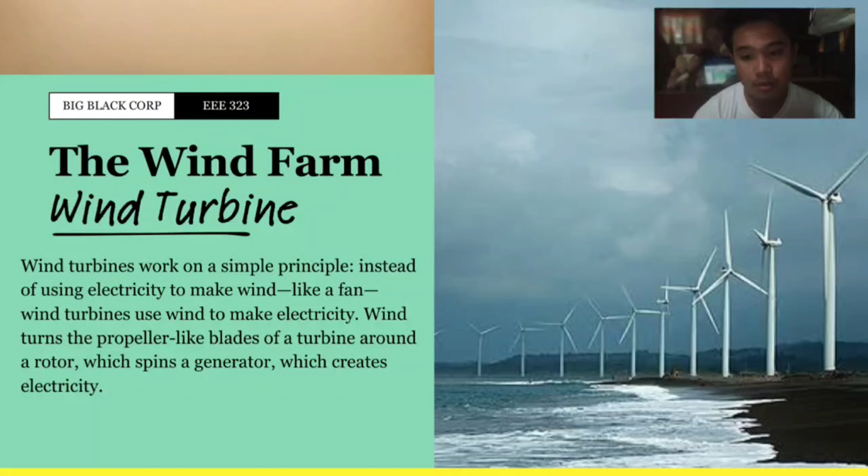So today, me and my company are going to discuss the topic of wind farm, specifically the wind turbine. So what is the basic principle of a wind turbine? Wind turbines work on a simple principle. Instead of using electricity to make wind, like a fan, a wind turbine uses wind to make electricity. Wind turns the propeller-like blades of a turbine around a rotor, which spins a generator, which creates electricity. So that's the basic operating principle. Before we move to the next slides, let's watch a short video we will present to you, so we can see how an actual wind turbine functions.

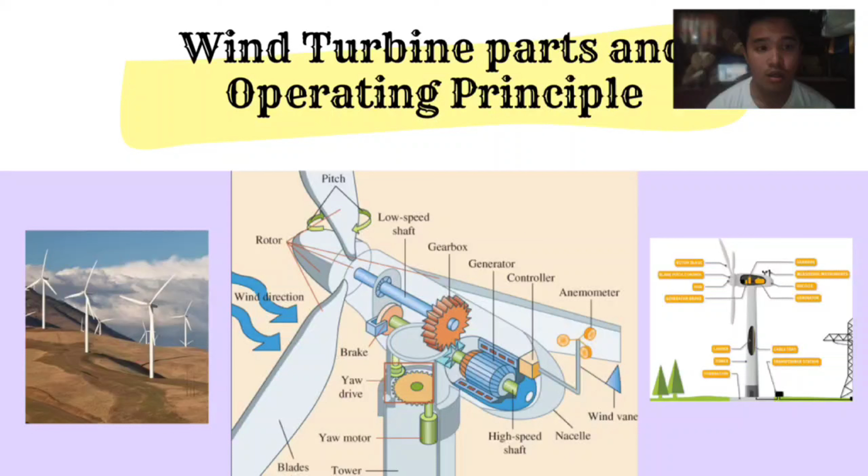And lastly is the nacelle. The nacelle is basically just the housing for our wind turbine parts. And to better understand the functionality and proper arrangement of our wind turbine parts, it will be discussed by my co-members.

So next, the blade is the part that rotates due to the force it catches from the wind. It is connected to the low-speed shaft via the hub. The low-speed shaft is connected into the hub and then connected to the gearbox. Then the gearbox is connected to the high-speed shaft, going to the generator. Once the blade rotates, it causes the rotation of the generator, thereby generating electricity. Most wind turbines consist of 3 blades for maximum efficiency.

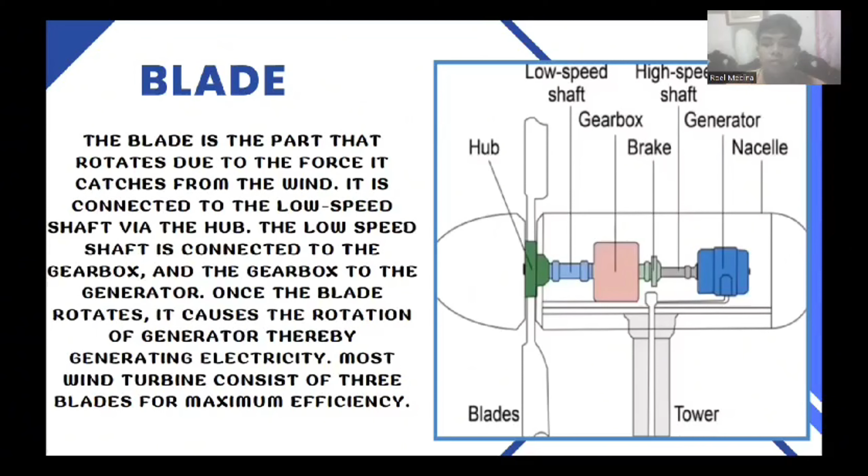Next, blade design. To produce an amount of power, wind turbine blades generally need to be large and tall. It is shaped to generate the maximum power from the wind at the minimum cost. In designing the turbine blade, the longer the better, because the longer it gets, the more capable of capturing kinetic energy coming from the wind. Improvements in design have produced new wind turbines which are more compact, quieter, and generate more power from less wind. Their length varies around 50 meters, with 107 meters currently the longest from Siemens Gamesa.

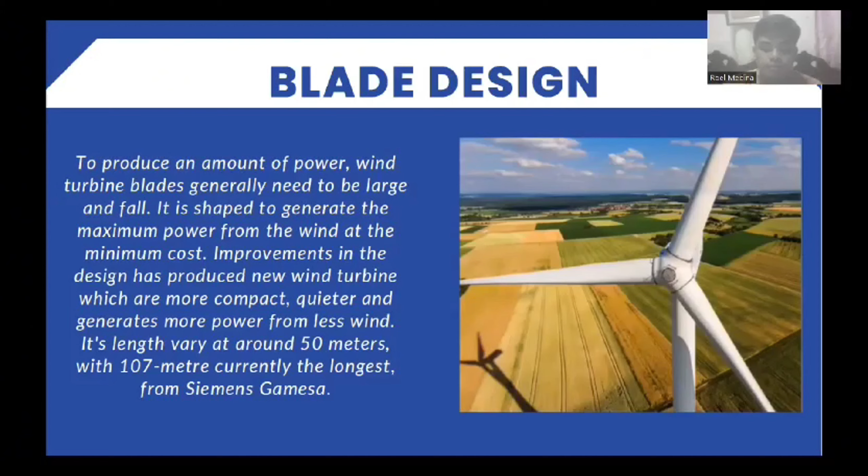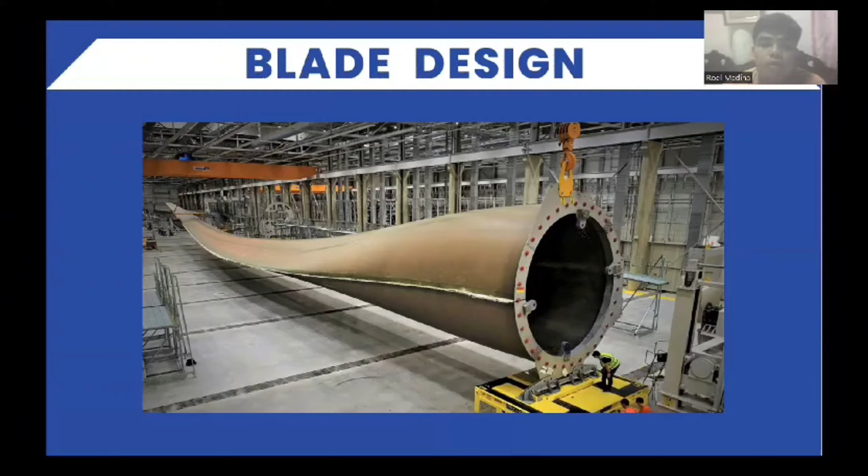Okay, next, this is an example blade made by Siemens Gamesa. As you can see, if we compare it to a person, this blade is really large. Next slide: the airfoil is the cross-sectional shape of the blades determines its aerodynamics.

This is the cross-sectional area. When cut, this is the resulting shape. The variant of the blade turbine differs, but mostly this is the shape, and it plays a vital role in its aerodynamics. This shape of the cross-sectional area of the blade causes it to rotate faster than the wind velocity.

They are key to the blade design. This airfoil design allows the blade tip of a wind turbine to move faster than the wind is moving, thus generating more power and higher efficiency.

Now we need to determine the more curved and the less curved side. This part is the more curved or rounded outward, and this side is the less curved side, which is rounded inward.

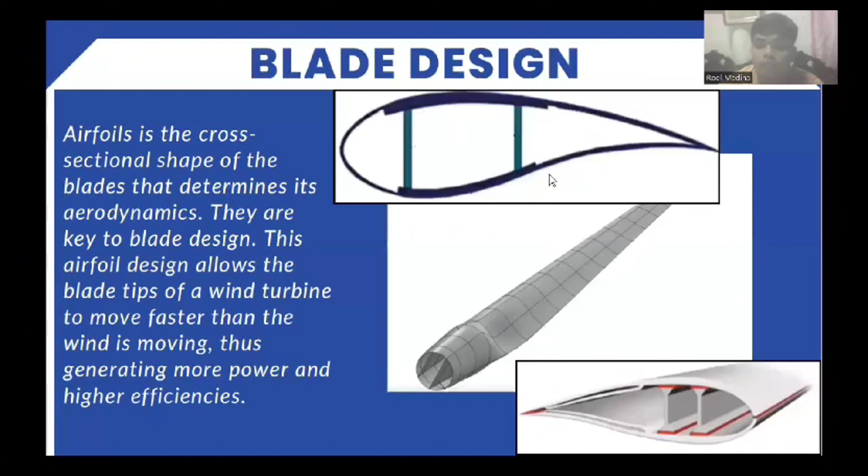In addition to its curved design, twisted and tapered blades further enhance its aerodynamics with the combined effect of twisting and tapering the blade along its length, improves the angle of attack, increases speed, efficiency, and lift, while reducing drag. Here, it's not just simply curved in design, it is also twisted and the edge of the blade is also tapered.

Blade aerodynamics: wind turbine blades work by generating two aerodynamic forces, lift and drag. This is due to the wind and the airfoils. The lift force is perpendicular to the airflow and is in line with the blade rotation. On the other hand, the drag force is in the line of apparent wind direction, which means it is in opposition to the wind direction or the blade motion. The drag increases in proportion to the frontal area of an object facing the wind.

And both of these are formed by the difference in air pressure across the two sides of the blade, which creates both lift and drag.

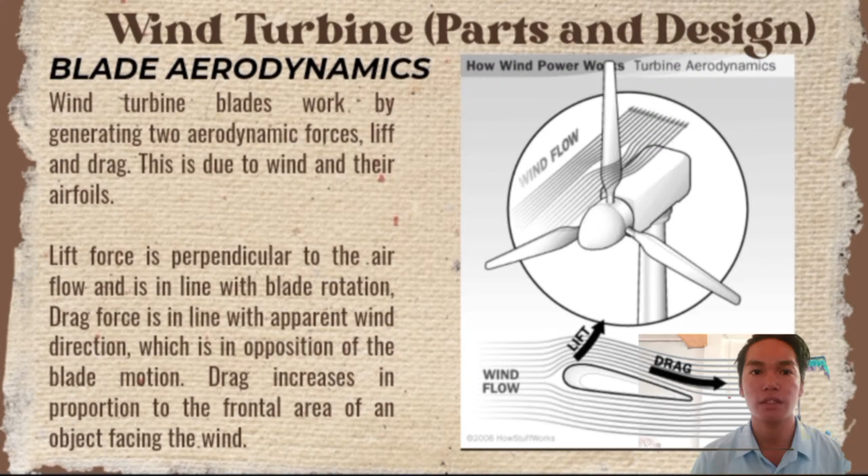Here we can see the lift and drag formula. I won't explain this too deeply, but you can see in the picture the angle of attack, relative wind, and center of pressure, and the equations. So for that equation, we have the lift equation and the drag equation, where lift, or capital L, is equal to the lift coefficient C sub L, times the density rho, times the half of velocity V squared, times the area A sub B over 2. It's the same for drag force, just with a different value.

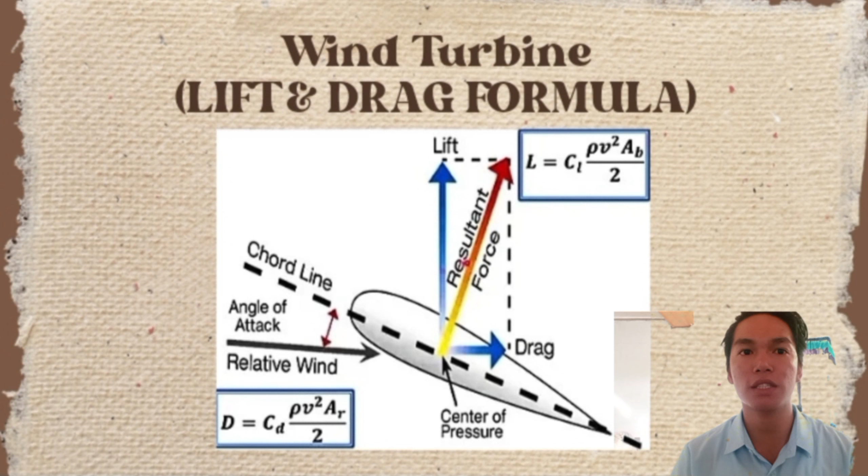Another thing the airfoil is able to do is allow the blade to attain the difference in pressure on both sides, which I mentioned earlier. The more curved, or convex side, will generate low air pressure, while the high pressure air pushes on the less curved side, or the slightly concave part. This is the actual reason for the blade rotation.

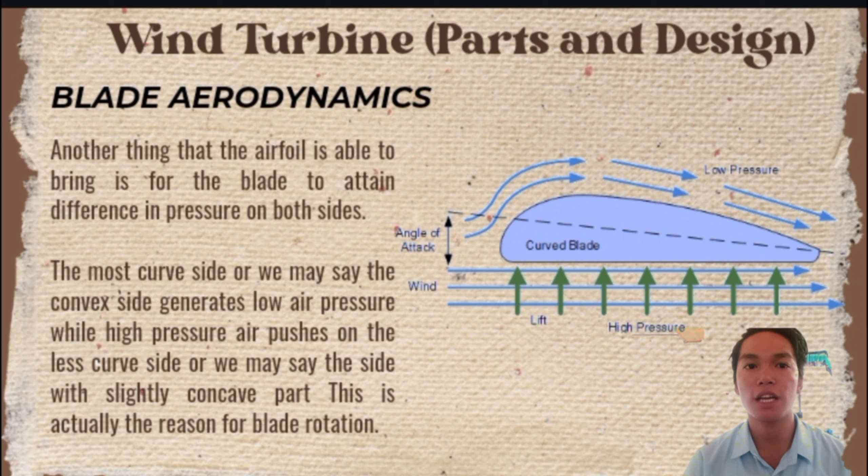And actually, if the force of lift is stronger than the drag, that will cause the rotor to spin.

Next slide, we have here the blade wind orientation. Here's now the question based on the figures stating the optimum angle of attack. The angle of attack is the angle at which the relative wind meets the airfoil, and it's an angle formed in the chord of the airfoil at the direction of the relative wind.

And here's a question: which part of the blade is the leading edge and the trailing edge? Front and back.

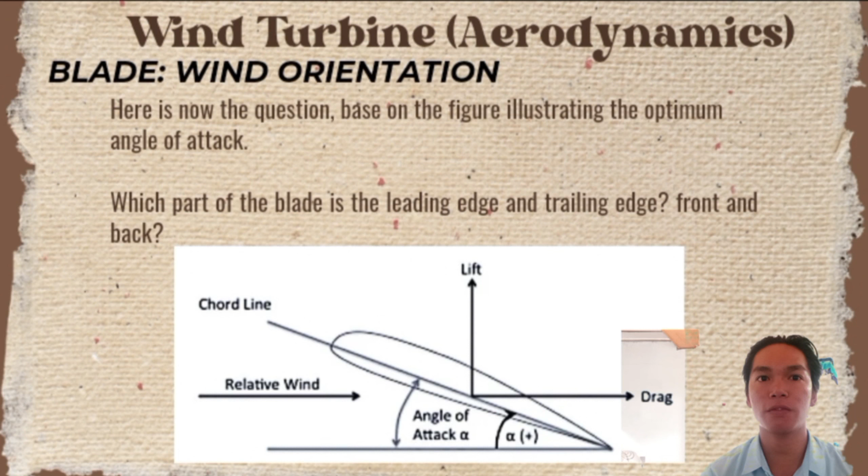The leading edge is the part of the blade that is first hit by the wind in normal operation. This leading edge is usually fatter than the trailing edge, and typically should be smooth with no imperfection. The trailing edge, on the other hand, is the blade at the end of the airfoil. It is usually a knife edge of the blade, although today the trailing edge can be what we call the flat back of the airfoil, in which the knife edge is cut off flat, which allows for a stronger structure and less weight.

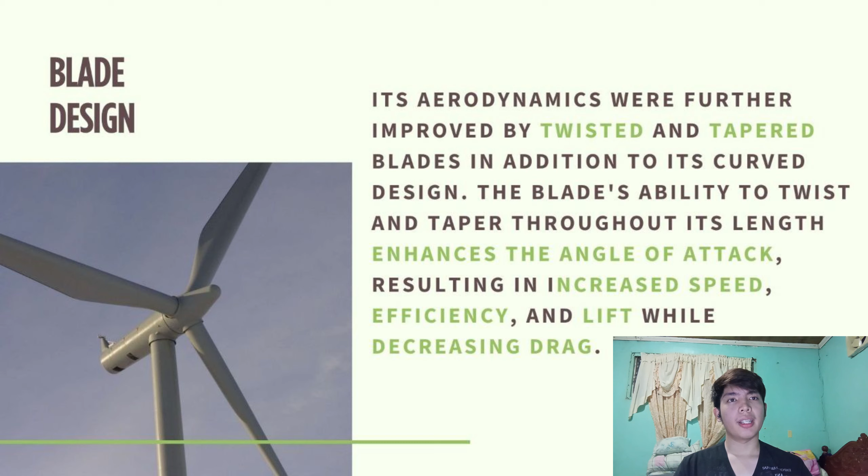What does this help with? Why do wind turbine blades need to be twisted and tapered? This helps improve or enhance the aerodynamics—it improves the angle of attack, making the rotation faster since the lift force is increased and the drag force, which opposes the rotation of the blade, is reduced.

Because the more curved part has lesser pressure compared to the less curved part, which has high pressure, and we know that movement is from high pressure to low pressure. So that's what makes the wind turbine function and rotate.

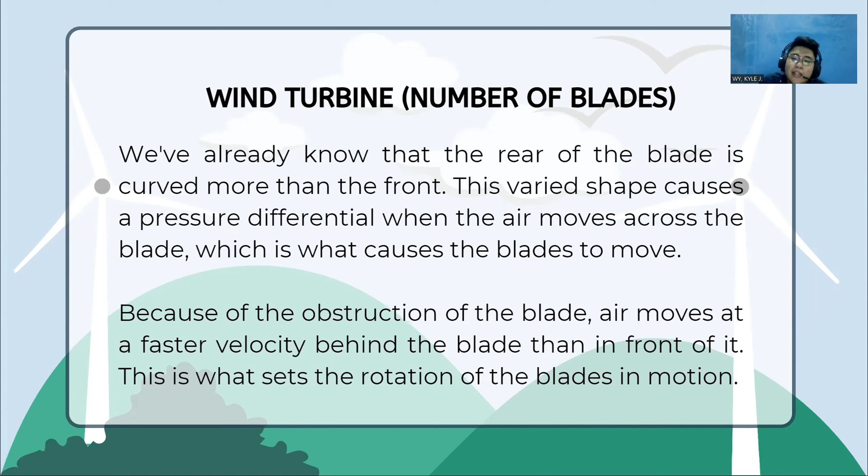Because of the obstruction of the blade, air moves at a faster velocity behind the blade than in front of it. This is what sets the rotation of the blades in motion. So this just means the air moves faster behind it than in front of it.

Engineers must consider speed and drag in designing the blades to ensure the highest level of efficiency. For example, if too much drag is created by the obstruction of the blades, the power yield will be a lot lower. If not enough drag is created, the blades could move too quickly, causing them to break the sound barrier. So this just means that as engineers, we need to balance speed and drag.

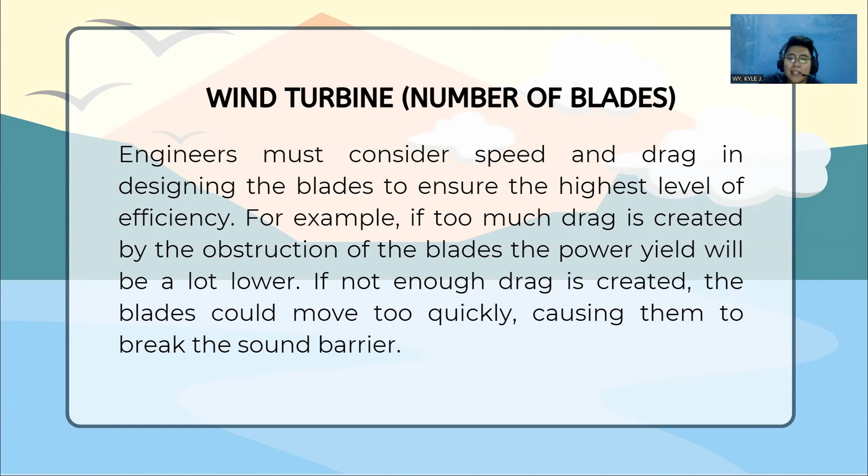So here's the rule of thumb for making wind turbines: the fewer blades, the better, since there will be less drag and an increase in efficiency. So fewer blades means less drag, which reduces slowdown and increases efficiency—meaning the rotation becomes better.

Next, the number of blades increases the torque and reduces the optimum rotation speed. So when we add more blades to a wind turbine, the torque increases, but the rotation speed is reduced. With more blades, it rotates more smoothly because there's a balanced force causing rotation in the windmill. So having fewer blades reduces drag.

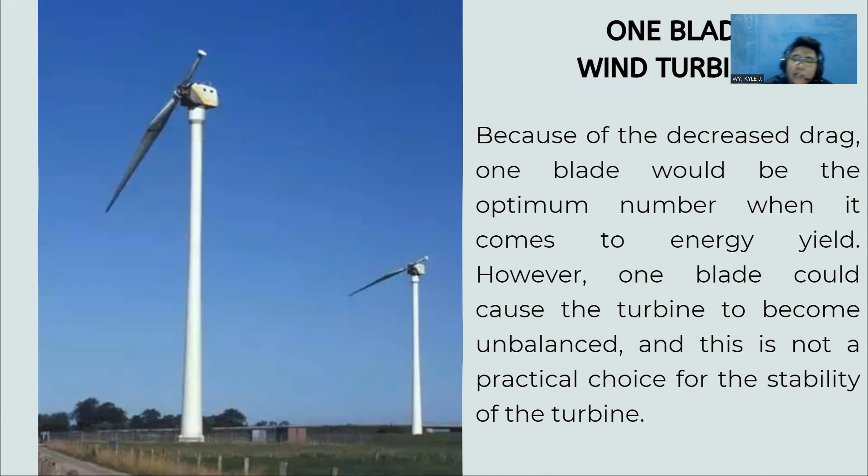So, next is the two-blade wind turbine. At first glance, a two-bladed turbine seems like the optimal configuration for a wind turbine. Perfectly balanced and with one blade less than a three-bladed turbine, they will generate less drag. So why aren't all turbines made with two blades?

It has troubles in yawing. Yaw is when its head or nacelle turns to face the wind. Due to the effect called gyroscopic precession, when a two-blade turbine yaws, it creates a wobble as the blades go from the vertical plane to the horizontal plane, which places additional stresses on the mounting bearings, wearing them down faster.

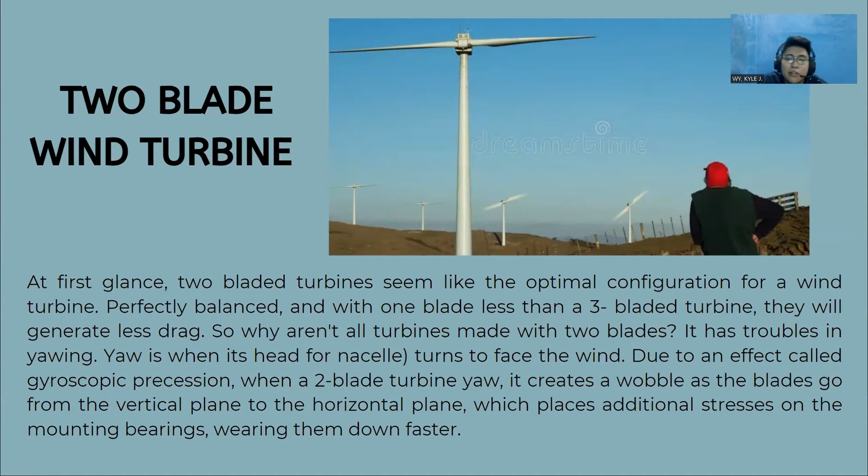So, next, more than 3 blade wind turbine. Any number of blades greater than 3 would create greater wind resistance, slowing the generation of electricity and thus becoming less efficient than a three-blade turbine.

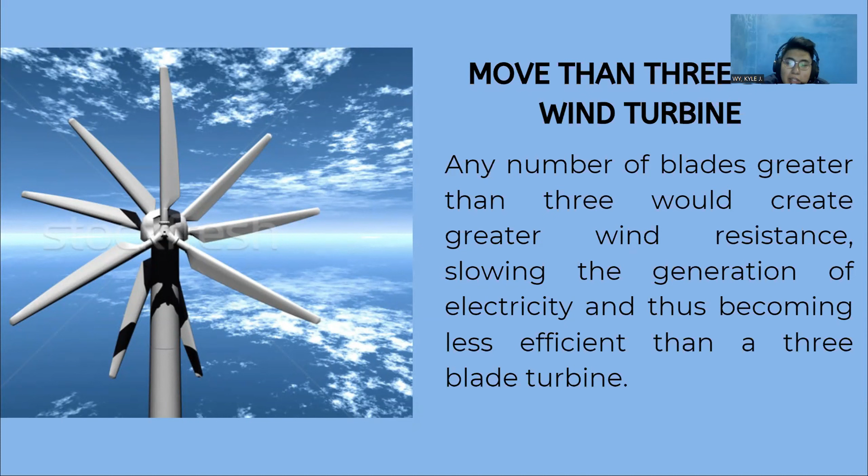So, here we are at the three-blade wind turbine. For these reasons, turbines designed with three blades are the ideal compromise between high energy yield and greater stability and durability of the turbine itself.

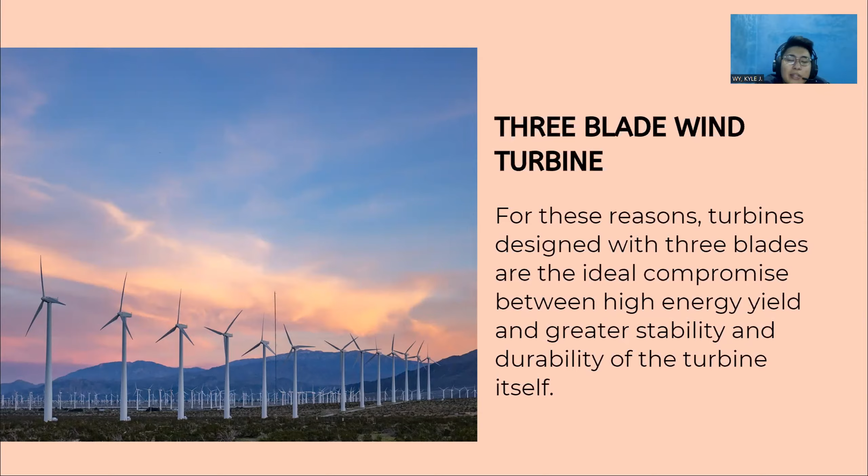So, let's proceed to the blade tilting mechanism. According to the wind speed, the relative velocity angle of the wind also changes. The blade tilting mechanism is a sensor-coupled part of the wind turbine which tilts the blades and guarantees proper alignment of the blades with the relative velocity, so that its position is always at the angle of optimum attack.

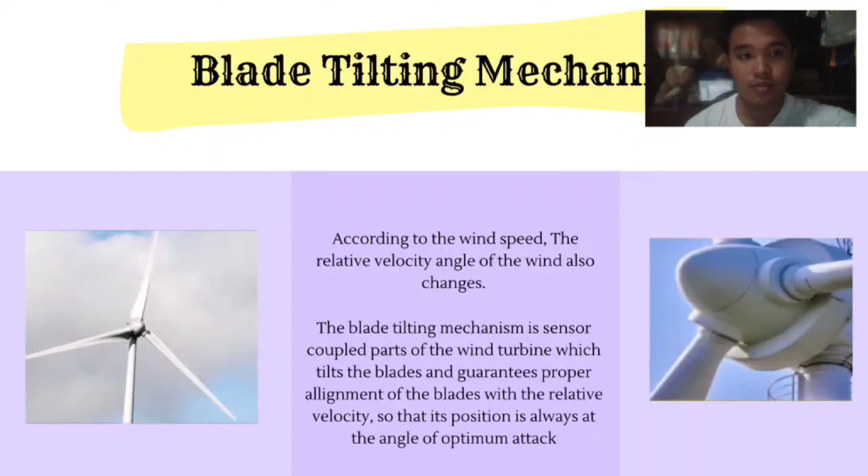And then next is nacelle. Sabi dito, nacelle. The nacelle sits atop the tower and contains the gearbox, low and high speed shafts, generator, and brake. Some nacelles are larger than a house, and for a 1.5 megawatts geared turbine can weigh more than 4.5

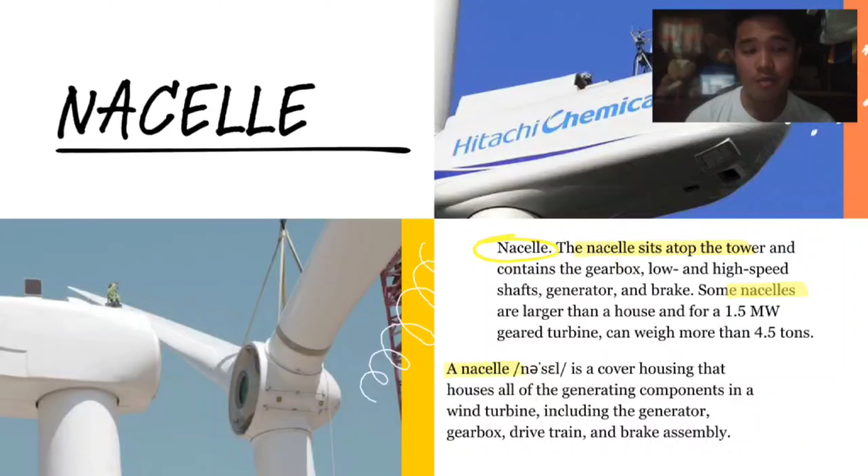Gearbox, the component which converts the slow rotation of the blade into faster speed. This is needed simply because the rotation of the blade generated from the force of the wind is usually not enough for the generator to achieve a great quality voltage output.

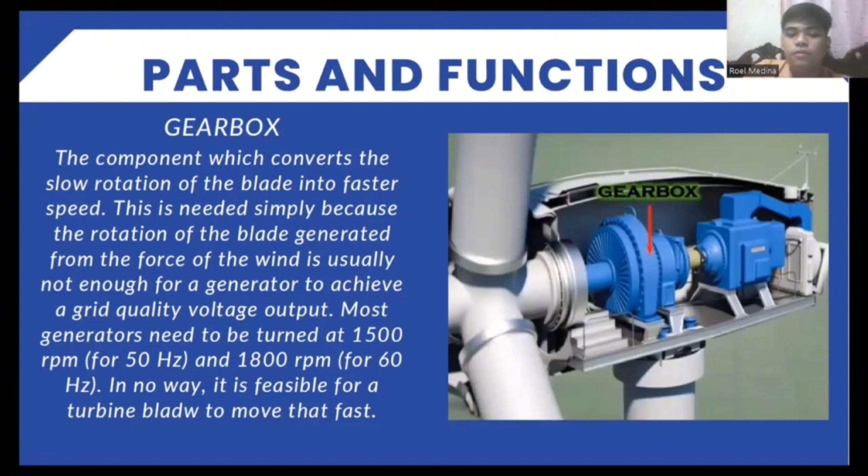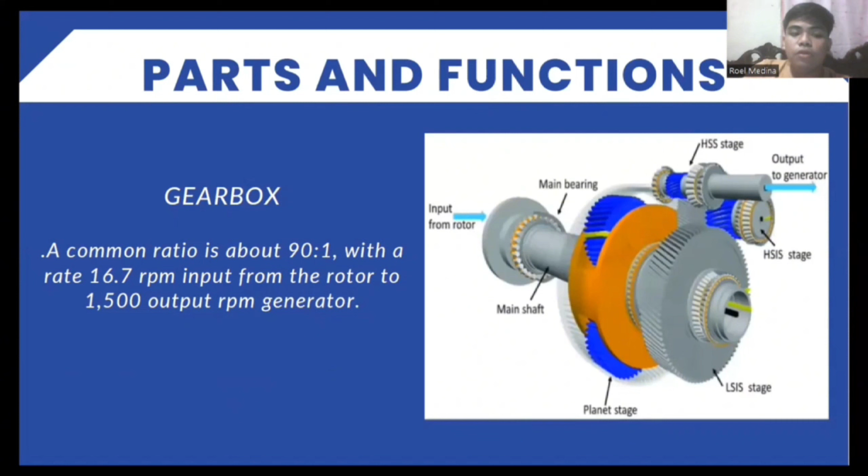So, next. A common ratio is about 90:1. Yun yung sabi ko kanina. With the rate of 16.7 RPM input from the rotor to 1,500 output RPM generator. So, next. Alternative design. Direct drive, gearless. In a direct drive turbine, there is no gearbox. The main shaft spins the generator directly, causing it to spin at the same speed as the turbine blades.

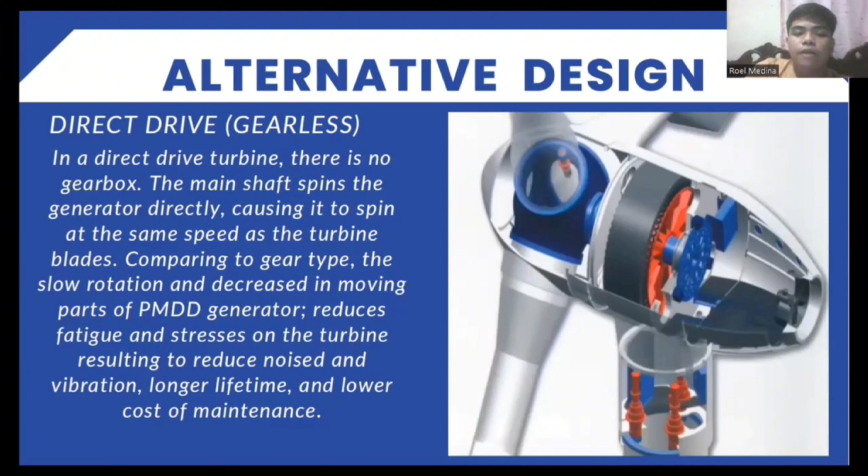Comparing to gear type, the slow rotation and decrease in moving parts of PMDD generator reduce fatigue and stresses on the turbine, resulting to reduced noise and vibration, longer lifetime, and lower costs of maintenance.

One main disadvantage of PMDD is that to make up for its lower rotation, more magnets are added to create the required frequency and power. This increases the diameter of the generator, which makes it larger and often heavier than gear type wind turbine. Another thing is that the additional magnets being used in this type is made of neodymium, which is expensive. Yun yung sabi ko kanina, yung ginagamit dito is yung neodymium na sobrang mahal pag bibili.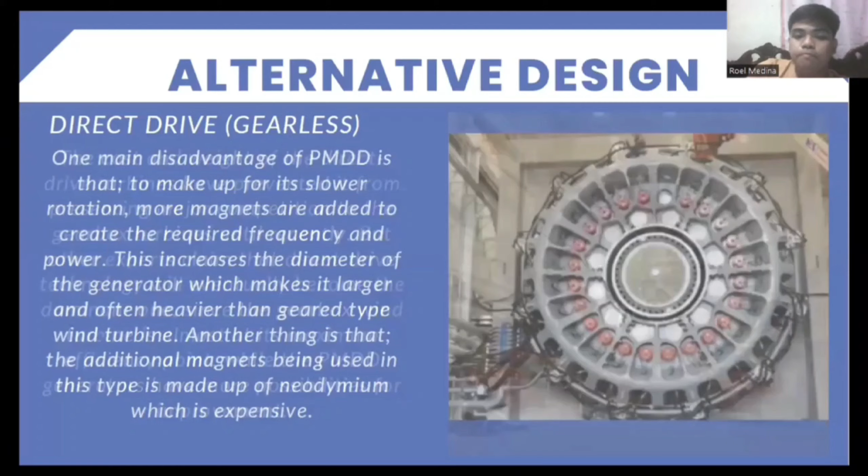So next, the cost and the weight of the direct drive turbine have prevented it from presenting major competition to the gearbox turbine until recently.

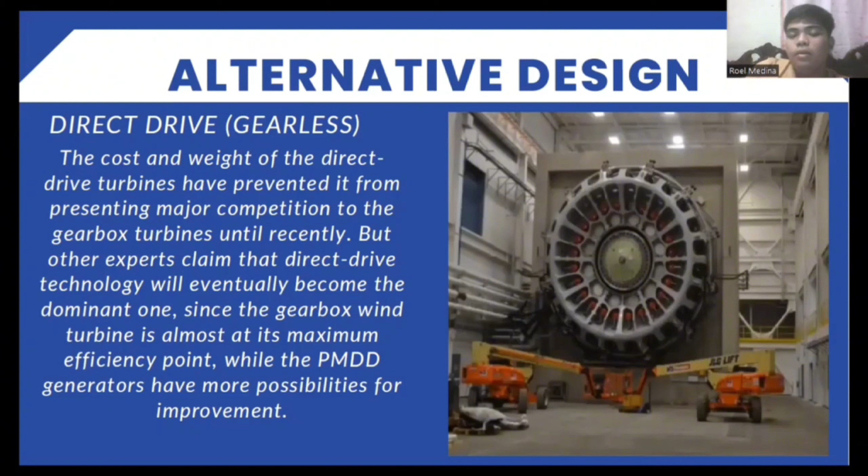Brakes. The brake system in a wind turbine is a protective device coupled with sensors which automatically stop the rotation of the blade whenever it detects activities that could harm the system.

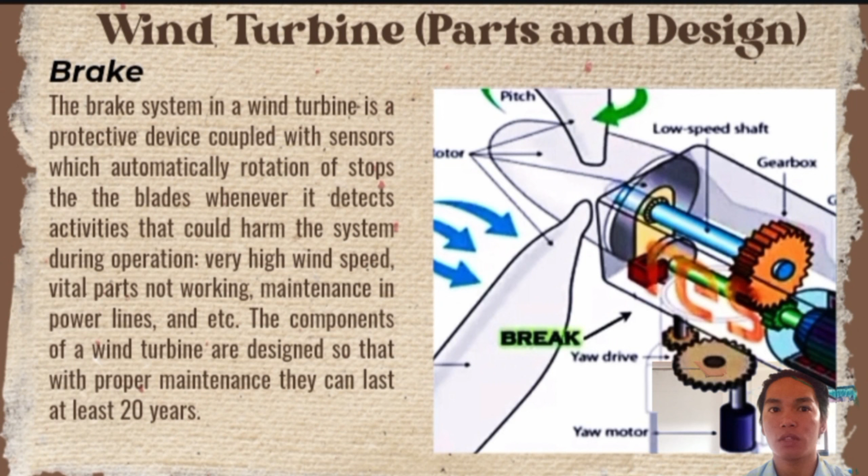Next is the yaw system. The yaw system is a sensor-equipped machine consisting primarily of yaw motor, yaw drives, and others. Its function is to automatically rotate the nacelle on top of the tower so that the set of blades is facing the wind directly at all times. And it detects the direction through the electronic information being fed by the wind vane located at the back. This ensures that the wind turbine is producing the maximum amount of

electrical energy. And sa madaling salita, yung yaw system is comprised lang yan ng motor plus yung drive. Yung main purpose niya is to move the nacelle and blades according to the wind direction. And during the nacelle movement, a fair chance of cable twisting occurs inside the tower. And it enables the wind turbine to capture the maximum available wind, like nasabi ko kanina.

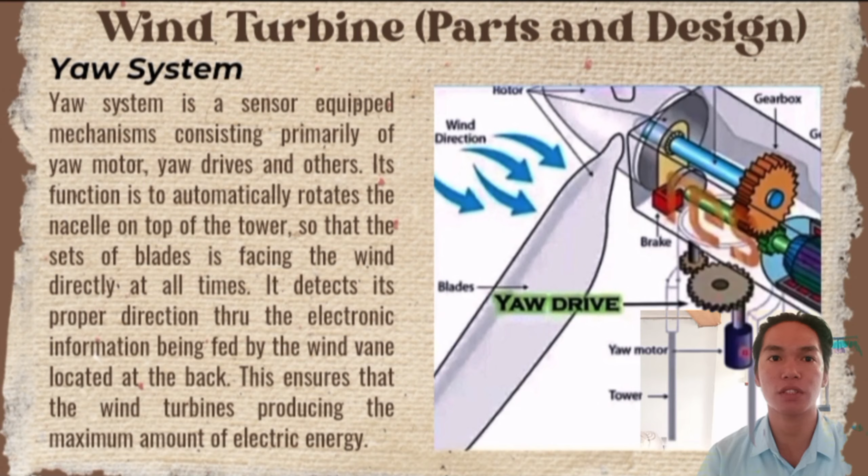Next, we have the tower. Wind velocity increases at higher altitude. It means the taller the tower, the greater the electricity it can produce. Majority of the wind turbines are supported by conical tubular steel towers with a height of usually 75 to 110 meters, or approximately 250 to 370 feet, depending on the blade diameter.

And pinakamataas or the tallest steel completion in 2022 is 280 meters, to be installed at the test center in Western Jutland, Denmark. And yung tower, sa madaling salita, ito lang yung nagsusupport sa structure ng turbine. And usually, it comes in 3 sections and is assembled on site. Kasi, sabi nga doon, the wind speed increases with height. Yung pinakamataas yung altitude. And the taller the tower, the better to capture more energy and generate more electricity.

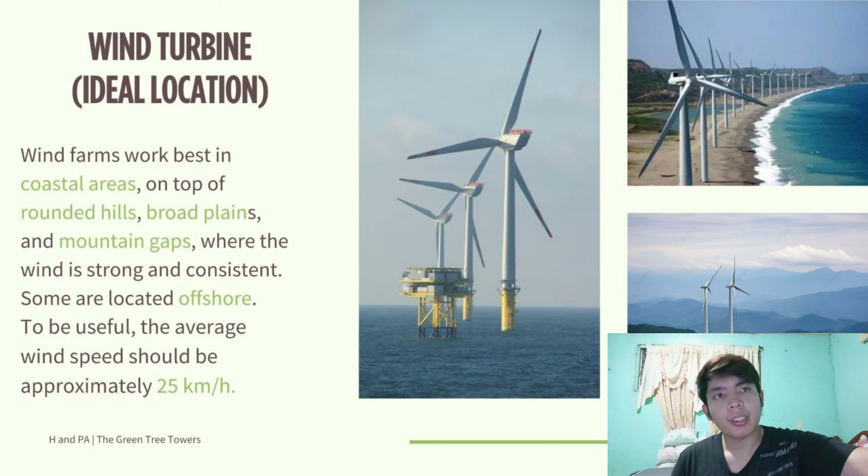I-discuss naman natin ngayon yung disadvantages and advantages ng paggamit ng wind turbine. So, unahin natin yung advantages. Here are some advantages of using wind turbines. Number 1, wind is free, wind farms need no fuel. So, hangin lang yung ginagamit natin dito, kaya hindi na natin kailangan ng fuel. Number 2, produces no waste or greenhouse gases. Siyempre, dahil nga hangin lang, hindi siya magpo-produce ng waste or greenhouse gases. Number 3, the land beneath can usually still be used for farming. So yung lupa daw pwede pa natin magamit pang farming. Number 4, a good method of supplying energy to remote areas.

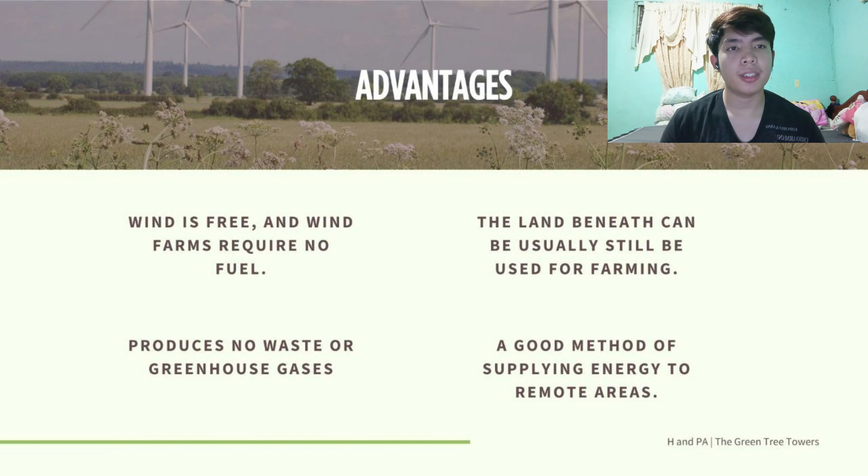Now let's proceed to the disadvantages. For the disadvantages of wind turbines, number 1 is the wind is unpredictable. It changes speed throughout the day and from season to season. So yun, mako-consider natin na disadvantage to dahil yung hangin is pwedeng bumilis, bumagal, lumakas or humina, or kaya mawala. Number 2, suitable areas for wind farms are often near the coastal area where the land is expensive. So ayun nga, nasabi ko rin kanina na karamihan ng wind turbine is makikita natin sa coastal area or sa tabing dagat. And disadvantage yun kasi mahal yung mga lupa dun. Number 3, can affect television reception in nearby places.

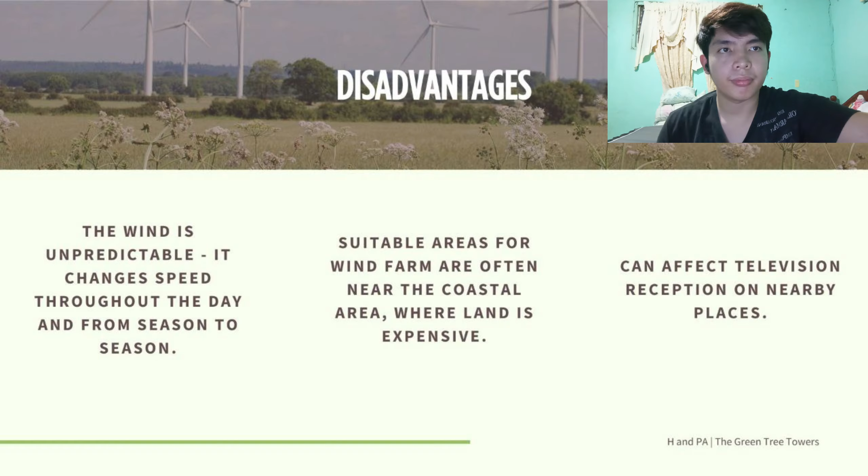So here are the largest wind farms in the world. The first one is the Gansu Wind Farm, which has the capacity of 7,605 megawatts, projected 20,000 megawatts, in the country of China. The next one is the Alta Wind Energy Center, which has the capacity of 1,548 megawatts and projected capacity niya is 3,000 megawatts. It is found in California, USA.

Next is the Muppandal Wind Farm, which has the capacity of 1,500 megawatts, and it is found in India. The fourth one is Hornsea Project 1, which has the capacity of 1,218 megawatts in the UK. The fifth one is the Markbygden Wind Farm, and it has the capacity of 1,120, and it is projected to have a capacity of 4,000 megawatts in Sweden. And lastly, the Jaisalmer Wind Park has the capacity of 1,064 megawatts in India.

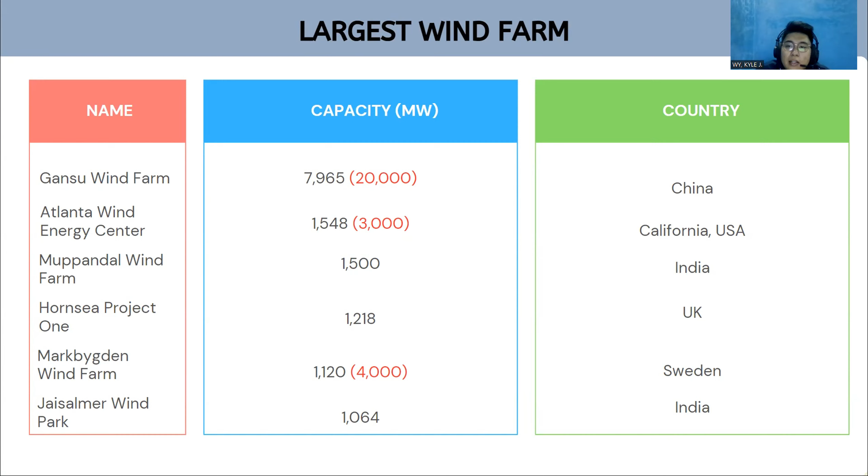So now we have the Gansu Wind Farm. As for the last slide, the Gansu Wind Farm is the biggest wind farm in the world. So let's proceed to the details of the Gansu Wind Farm.

So the Gansu Wind Farm project or Jiuquan Wind Power Base is a group of large wind farms under construction in western Gansu province in China. In 2008, construction began on a 750 kilovolt AC power line to carry electricity from the wind farm, and construction of the wind farms themselves started in August 2009.

In November 2010, officials announced the completion of the project's first phase involving the installation of over 3,500 wind turbines with an installed capacity of approximately 5,160 megawatts. It has an estimated cost of 120 billion Chinese yuan or 17.5 billion dollars. The project is being built by more than 20 developers.